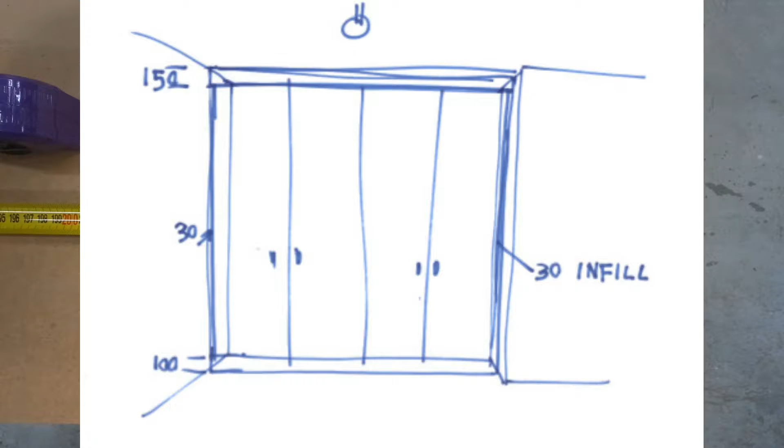If it's a number that's a bit tricky, you can also go the other way. Start from the 100mm mark of your tape measure so as not to include the end. You can come back 50mm, as you can see. We've got it going there. That concurs, so I'll just get that out of the road.

Okay, so that is the limit of our cabinet. So this is the bulkhead, and from here on down is the door. Okay, so what we're going to do now is use the square as a gauge, and follow along with me.

The front edge of the door. Now the door is 16mm thick. It's not essential to make the doors the correct thickness here, because all we're interested in is the height at the moment. Then we need to go 40mm back from that face to match what we had before in the other drawings, and then a further 16.

Well, first I'll do that. Let's do that. Now, we're not that fussed with the depth, we're more concerned with the height at this point.

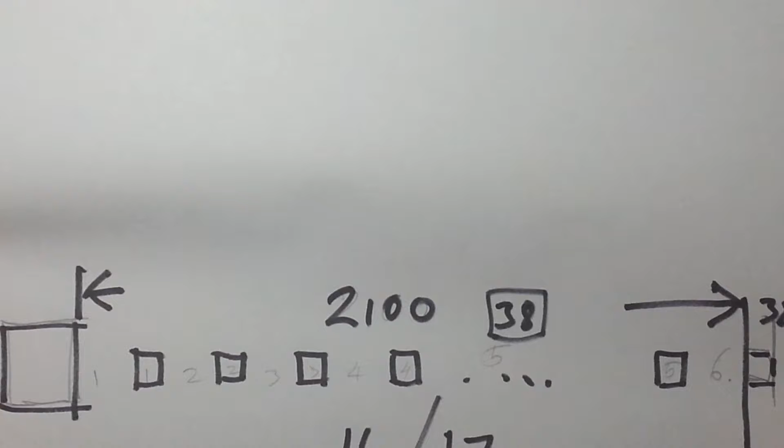Our total number is going to be 17 pieces. So we'll have 16 balusters and 17 spacers. So what we have to do is make our calculation include 17 balusters, 17 spacers. So the 2100 plus 38 is our beginning point.

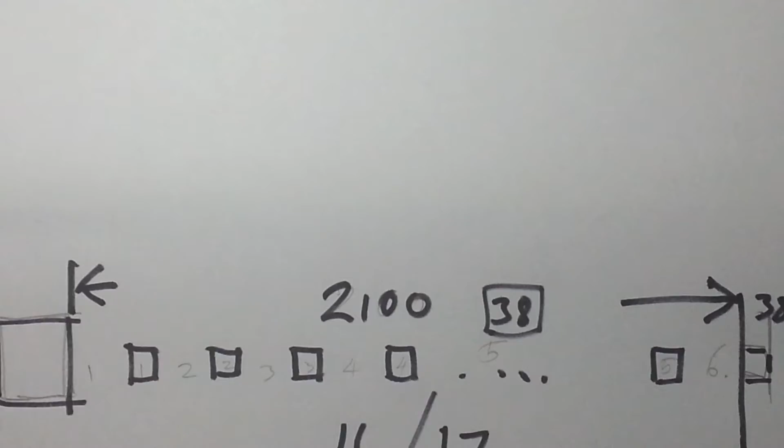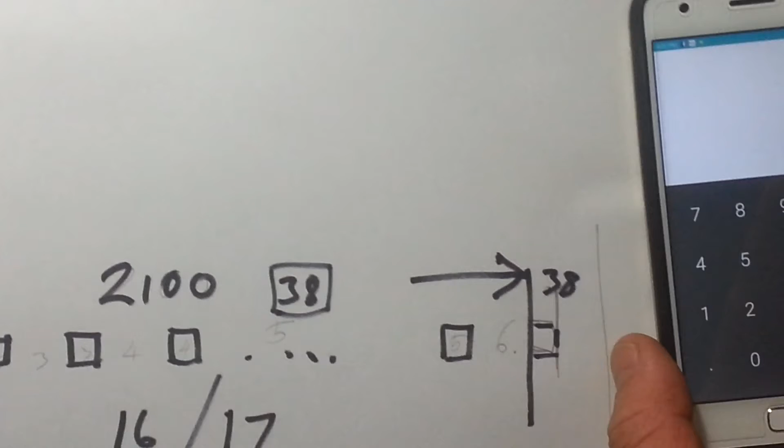I'll use the calculator here. So we have, can you see that? Okay, so if I fit on the same space, see if it does. So 2100 plus 38 is 2138, so it's pretty simple. Divided by 17 is some ghastly number, 125.76 yada yada yada.

Right, now the Casio calculators, which this is one of, if I do the same calculation, I hope I can, oh yeah, that's clear enough. So 2138 divided by 17 equals. Now if we go plus plus, there is a K that shows up here. K being for constant. So if I go 0, press the equals button, it'll add that number, the 125 point yada yada. Every time I press the equals key, it'll add 125 point yada yada to it.

So it's really good for flying along and marking those numbers. So I can go 0. In our case here, we're starting at a 100 millimetre mark. Now I'm not doing a balustrade here, I'm aware of that, but I wish to demonstrate this process of keeping our lines from accumulating an error. Okay, our kick was 100 millimetres high. So we'll go down the other end.

So in the event of us marking out - actually, it was 116 to here. So I'll type in 116. If we press the equals button, it gives us .241. Can you read that? 241.76. So let's call it 242 for the point of exercise.

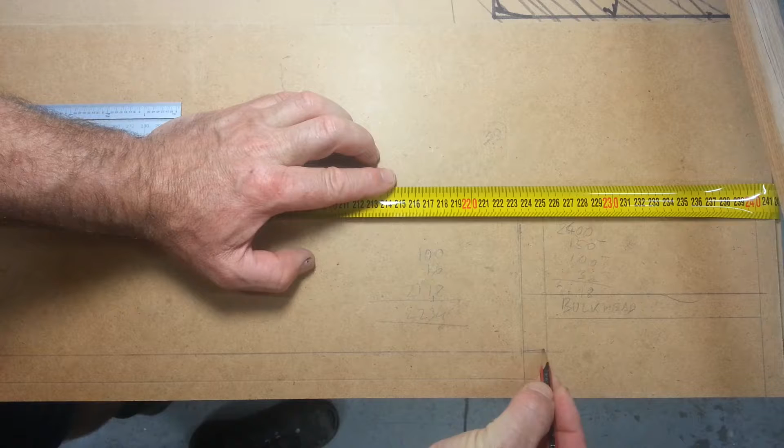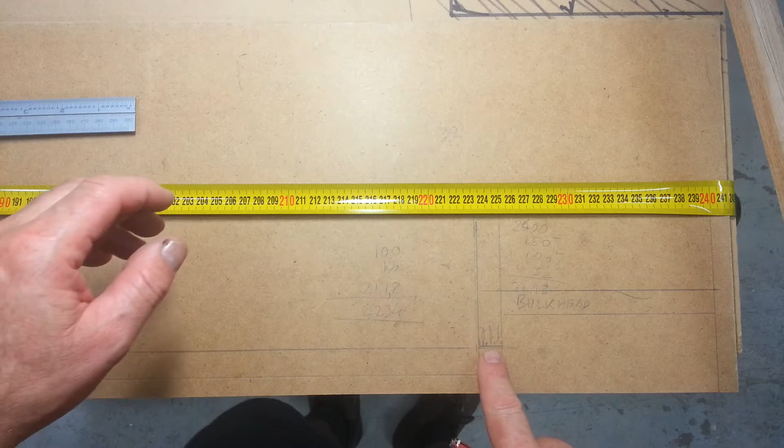Now we can also do something to symbolise the material we're using. This component here, the top, will actually have a bit of edging on it, so we can double up that line to indicate edging, and we can indicate particle board by doing this kind of thing. Just to see how well that shows up - very tricky, this stuff, to use a camera. So you can see here - can you just zoom in a tad? Okay, so there's the particle board symbolised here.

This door - I might write 'door' here just to remind us what this is. Now this unit is very simple, and I'm deliberately using this as a very simple example. Unfortunately it's got very large dimensions, but here we have, in any case, the ability to measure physically off this object, off this drawing, with the real object.

So if you needed to cut items to length, you could compare back to this view. Now again, I'm going to break up this to disguise, shorten the depth basically from front to back. So this is reasonably literal, but the depths aren't important - we're just concerned about the height in this particular run. Okay, so now I guess the next thing to draw would be just the other end, or the other side of the cabinet. Now the blades don't go all the way back, they just go between the door and the front side of the back, and the back is 16mm thick.

Okay. Now you can see here's the top - just write in the word 'top'. Whatever you need to do to symbolise what it is you've drawn. Everyone can invent their own symbols. It's not that critical as to which way things are done, just that you understand what you're drawing.

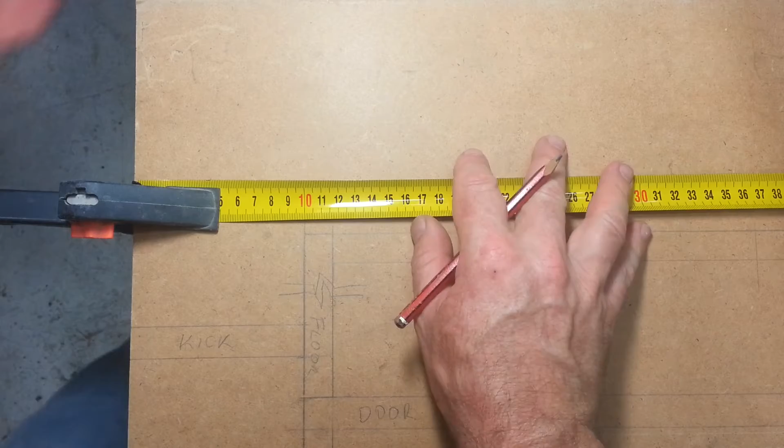Now what I might do behind that, I might set out the width. So again, we'll start this other end. I'll just move my tape measure to somewhere more practical. Now, as you may or may not remember from the other drawings I've done, we have a 30mm infill. So I'm going to start that here. We could get another panel, but I think I'll be able to fit this in here. I'll call this the front surface. So I'll start here.

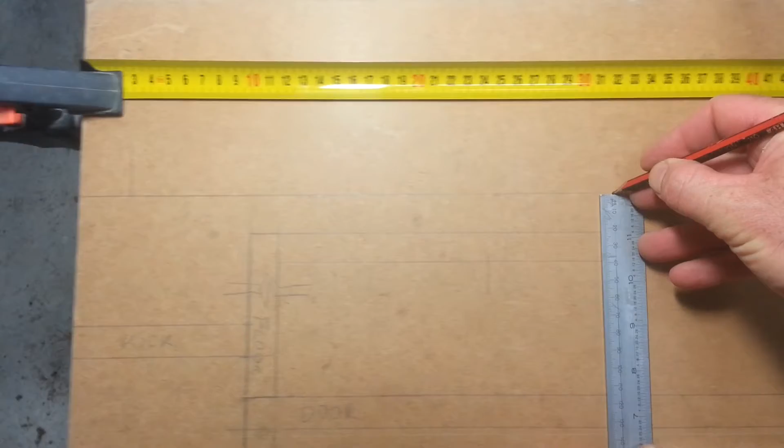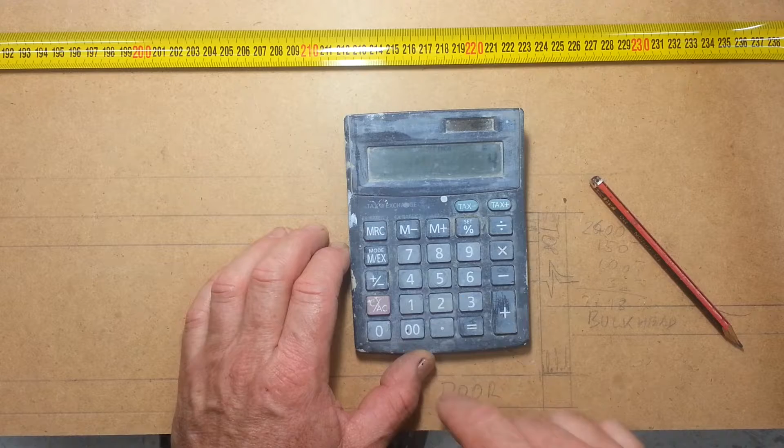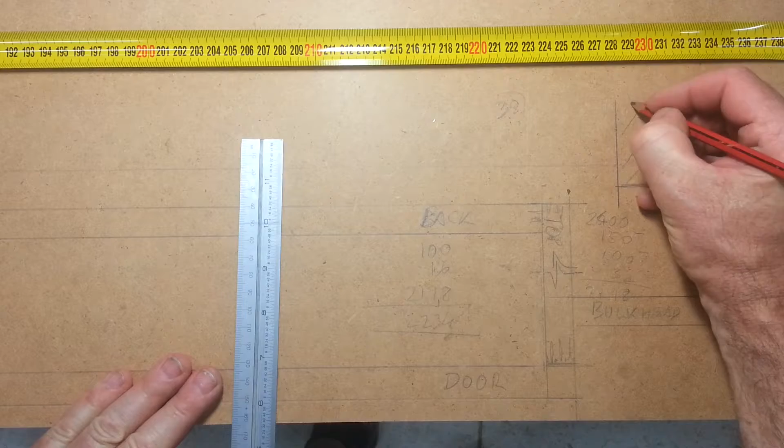Okay. Now, the width we had with our little kludge was 570 times 4. 2280. Okay, so 2280 is nearly the same as our other bits. Now this is the width of the wall, the opening. Okay, so 2280 is here, and I'll just... That's our wall. Okay, I might just make that line a bit deeper.

Okay, now 30mm off that's 2250. Okay, so that's our infill from there to there. The infill is nominally 16mm thick, same as that board. So we'll...

Okay, so then on this side, hopefully it'll show up well enough, we have a 3mm clearance. That'll bring us out to 33. And remember what I was saying about cumulative errors and pencil lines and resolving back all the time? So 33 is where I'm going to stop this. Okay, so we have one clearance here. This is infill. This is our first door. Okay, of course, the same is true the other end.

Three mm is going to be 2247. This is our infill again.

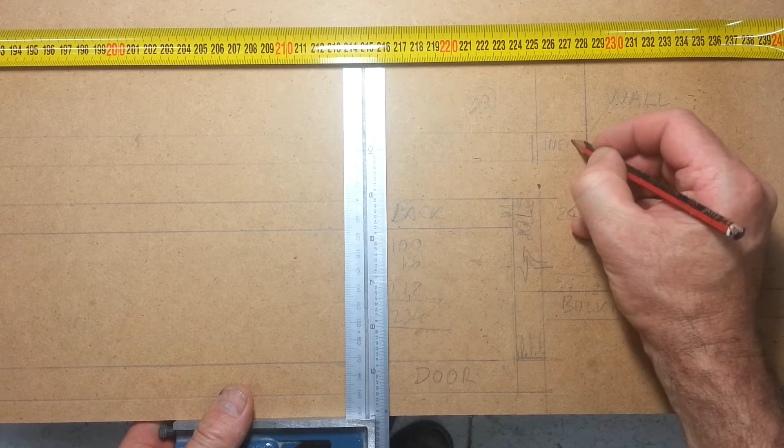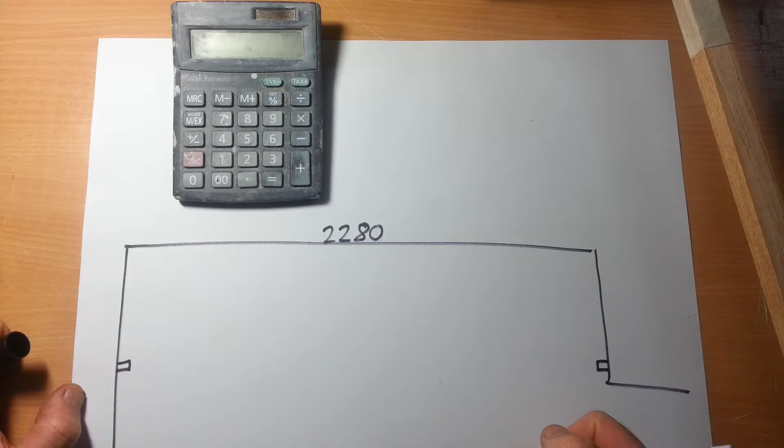Okay, so I'm going to try and explain this very clearly with a fat texter on a white piece of paper. Now, a wall opening is something like this, and it was 2280 overall. We have an infill over here of 30mm, an infill over there of 30mm, and then we intend to have 4 doors. Okay, so I'm just going to divide that up visually.

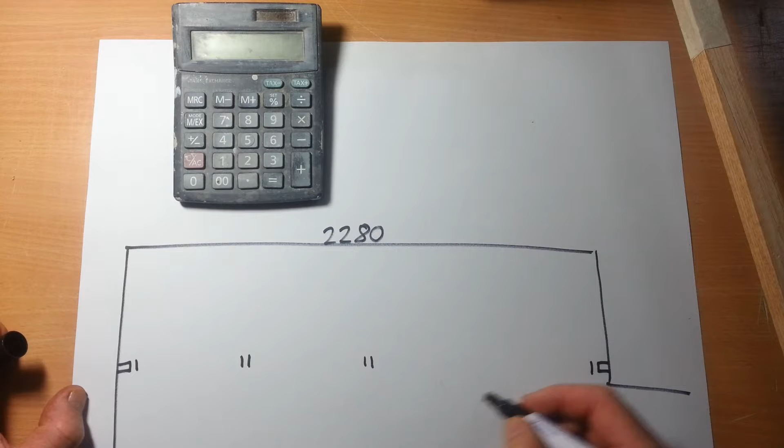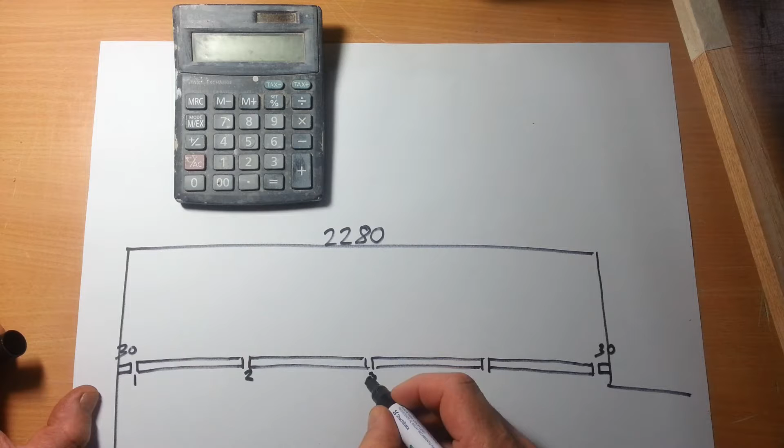Okay, so we have 30 here, 30 there, and we have 1, 2, 3, 4, 5 spaces. 1, 2, 3, 4 doors. So we have to bring our calculation to a point where we can divide by 4. So obviously we've got the infill either end of 30mm, so that's 60mm. 60mm off 2280 will be 2220.

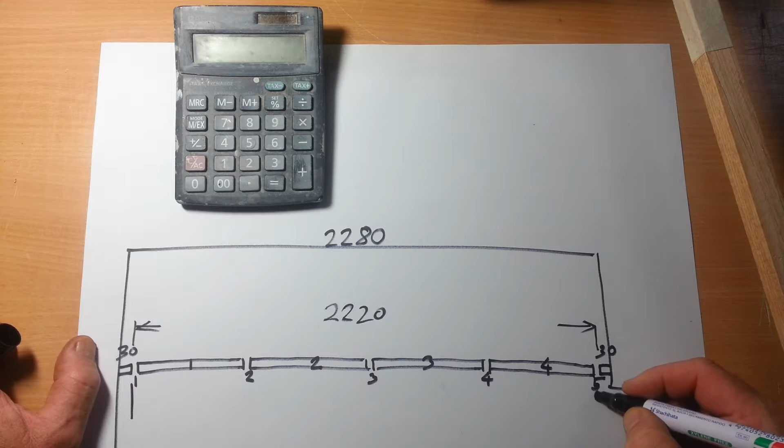Okay, so we've got that isolated, but we've still got a 5th space when we really only want to have 4 doors and 4 spaces, and that's each space is 3mm in width. So we'd have 2220. From here to here, we'd have 2220 less 3, which is of course 2217. But that gives us basically to that line there, from that line to that line there.

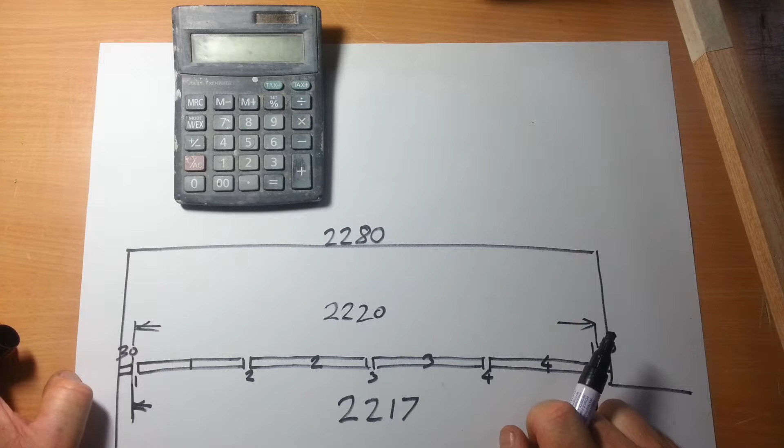Now, we've got the tape measure hooked on the setout rod from the end. So it's basically starting on the left-hand side of this infill. So we've got to keep our errors always resolved back to what the tape measure reads.

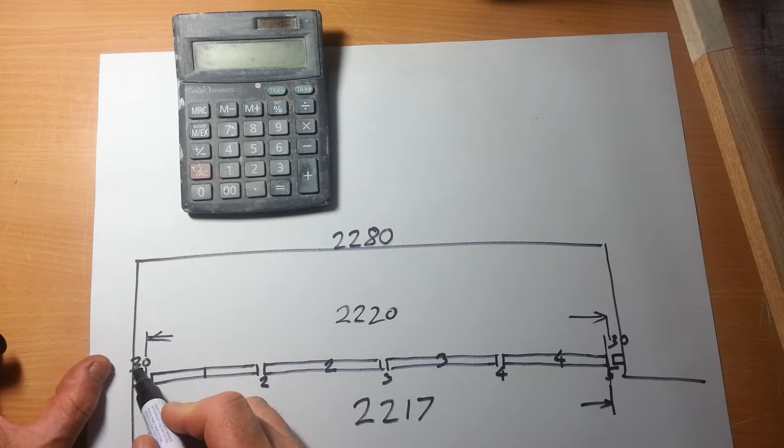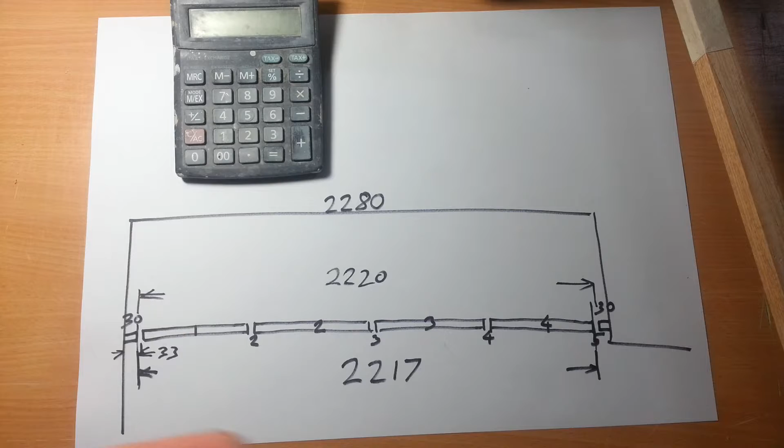Alright, so 2217 is our dimension. Now 30 is easily recognised on the tape measure, you mark that. Then you might even do the 30, the 3mm giving you 33. So from here to here is of course 33mm. Okay, so you may choose, I don't care which way you want to go, that's up to you. Move that better into your view. You could choose to start at 33 or at 30.

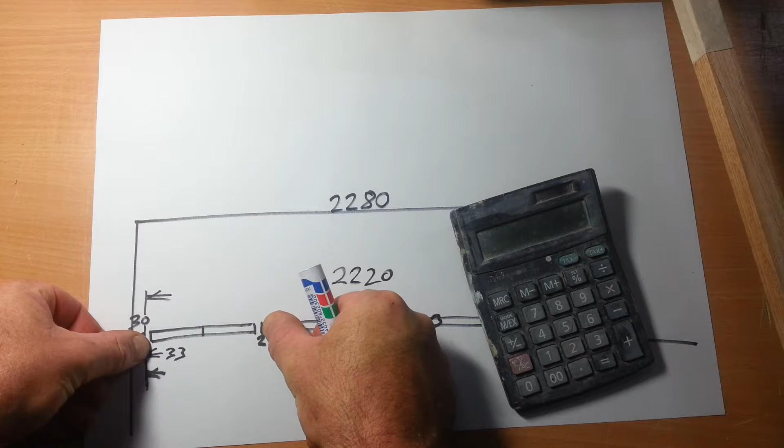If you start at 33, of course, your distance will be referring to the left-hand edge of the consecutive door. If you choose to start at 30, you'll be in the right-hand edge of the first door. So it depends how your logic works. 33 was easy for me to arrive at anyway, so I'm just going to go to the far side. Okay, it's gone to sleep. Put that where you can read it with the lighting.

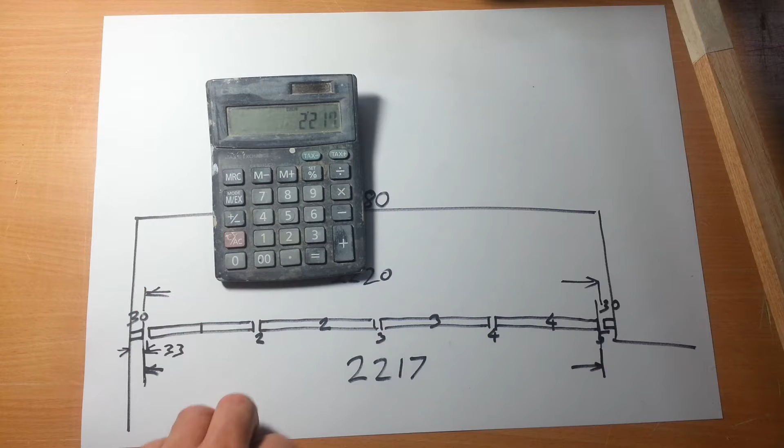So 2217 divided by 4 gives us the 554.25. If we press the plus key twice on a setout calculator, it gives us this K. I'm not sure how well that'll show up. I'll try and get it in a position where you can read it. Is it going to show up? It's a very poor old calculator, very much abused. There's a K in there, trust me. It's pretty hard to see. Alright.

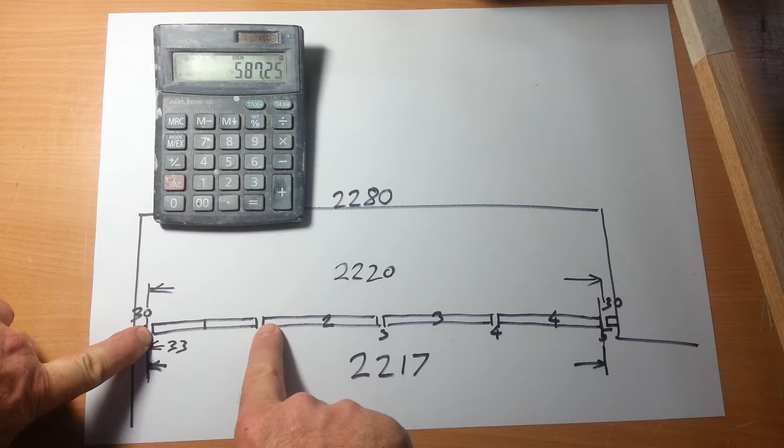So every time I press the equals button, it'll be adding that 554.25 to the number. If I want 0, it'll give me 554.25. If I give 33, which will be this line, it'll give me 587.25. Again, it will give us 1141.5. Again, it will give us 1695.75. Now it's all measuring from this edge because it's including that 33 millimeters.

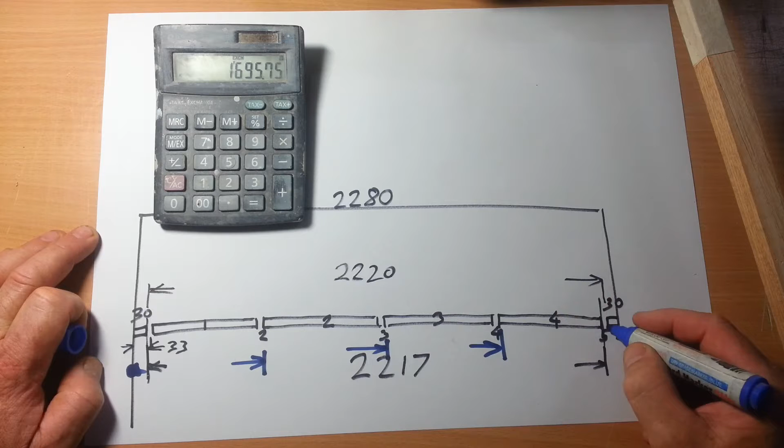So this is what's so important. It's always measuring back to this location, so I'm going to say it's to there, then to there, then to there, and then to there.

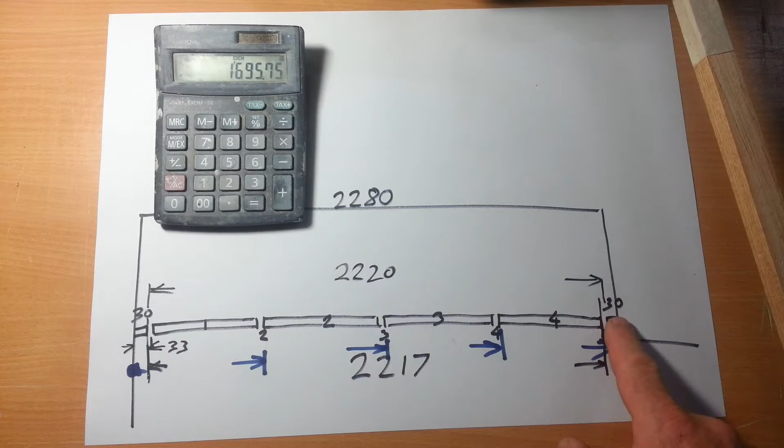There is a little bit of method to the madness of going this way. This will resolve to 2280 less 30. So I want to press this key one more time. It should give us 2250. 30 millimeters off 2280. Bingo, there we are, 2250. So that has not only given us our spacing, but it's also given us an answer that we will recognise very easily.

It's given us that detail right to the far end. So we know when we get there, if it doesn't give us exactly that number, we've done something wrong with our calculation. So it's producing a lot of error correction, this method. It's getting rid of our cumulative pencil line by nature, but it's also verifying that our calculations aren't skewy. If for some reason we divided the 2220 by 4, there would be an accumulated error as we get along.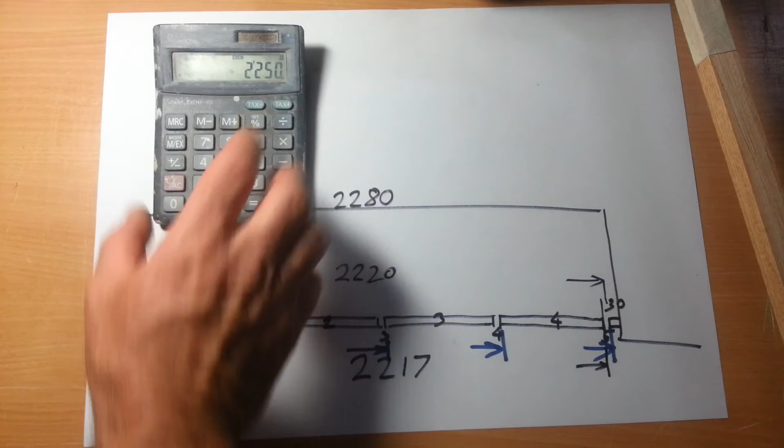Now I'll just try that. Let's just say we did make that mistake. I'll clear all of that. Let's do 2220 divided by 4. Just try and put that where you can read it. It's very difficult. Is that better? Yes, there we go. So we've got 2220 divided by 4, of course, is 555.

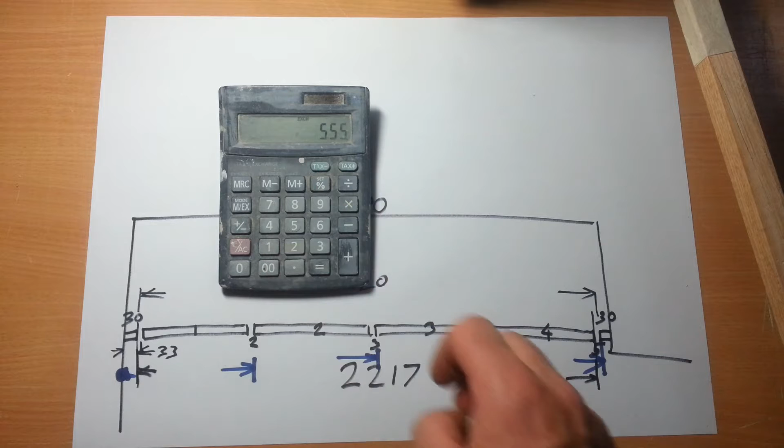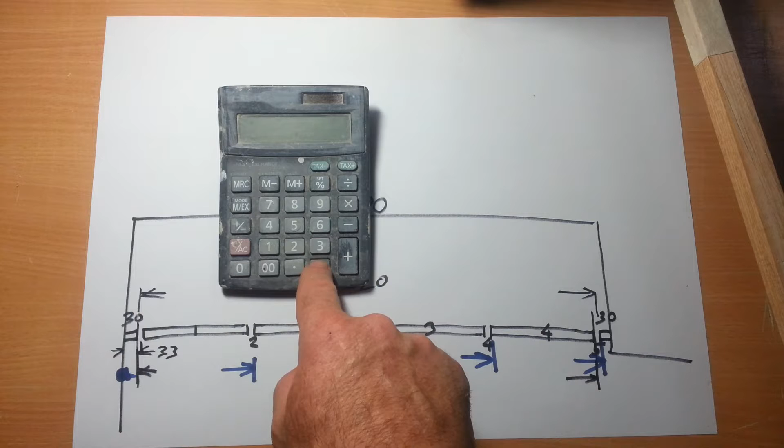If I started with, I'll go plus plus, if I started with 30 and went equals the 4 times, it'd give us 2250, which makes us feel like we're on that side. But the method to my madness of starting with 33 gives us an answer of 2253, which plays no part in our drawing. There is no dimension here. So this is why starting at 33 has a merit.

If you keep in your head that it has to be 2247, starting at the left-hand edge, that's all well and good. So it gets a bit tricky either way, but 33 works for me. You might disagree and think exactly reverse. That's your good business, but that works for me.

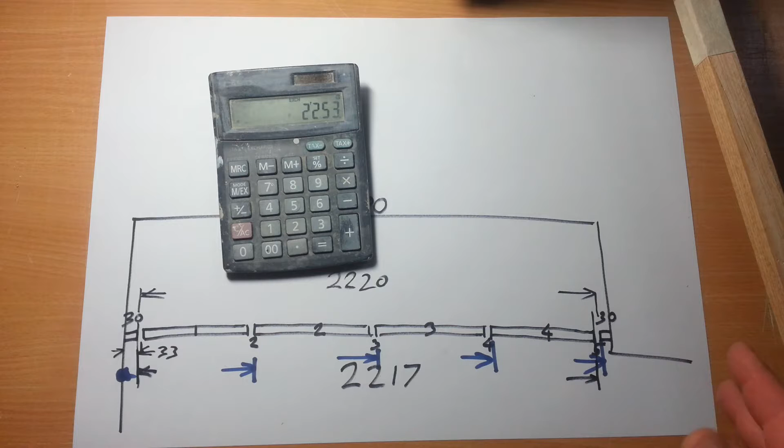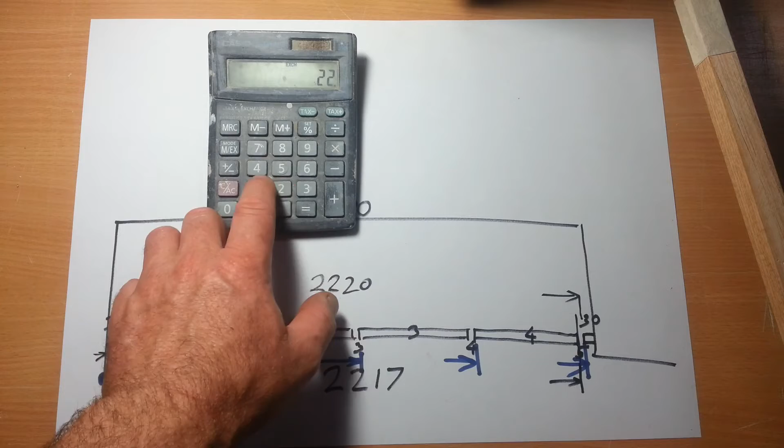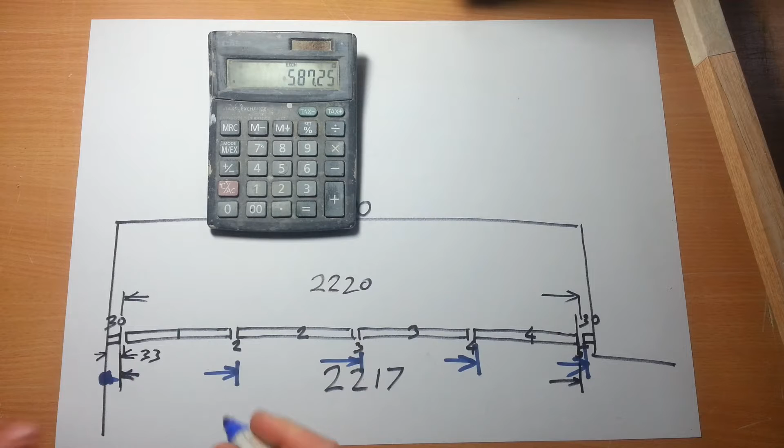Okay, so those are our numbers. I'll clear all of that and write them down on our little sketch here. I keep moving that to where my right hand works, but then you can't see it. Alright, so we've got 2217 divided by 4, plus 33, equals. So this dimension here is 587.25. Again, 1141.5. Again, 1695.75. And of course the last one is 2250.

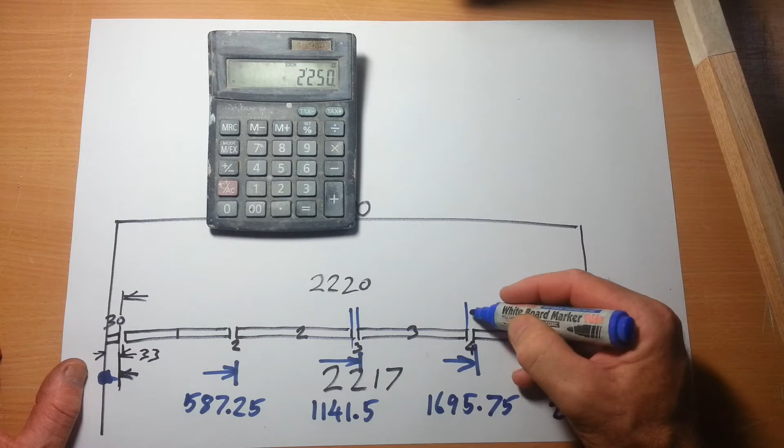And then of course we'd go in and just mark back 3 millimeters from each one of those edges, so we end up with those gaps of 3 millimeters. Alright, I hope that was clear enough. 1696, and basically we come back 3 millimeters. Now you can go along, I'm just going to guess it for the point of the exercise.

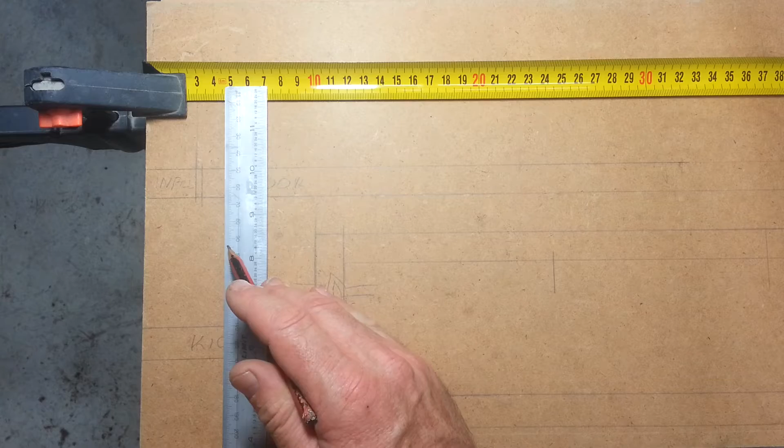We have the infill drawn in, and we've got the end panel of the cabinet. Well, let's show now. There we go. So this is the end panel of the cabinet, or blade. I'm going to call it a blade. The lighting's a bit difficult with this camera rig. Here we go. So we've got the other blade.

Now everything is concentric here, so here's the centre of the doors. The overall opening was 2280, so half of that would be 1140. That would be a very tempting thing to just use that calculation. But that assumes that both our infills are the same, so it depends where you want to go from. At the end of the day, it will produce this outcome on this job. But in any case, if you had to do something different, where your infills, say one side's 50 and the other side's, I don't know, 20, you may have to do something a little bit different.

But hang on, that's a bit out of position anyway. It's very easy to get these slightly errored. I'm out by about half a millimetre there. Okay, that's the division between the two cabinets. 16 millimetres both ways will give us the blades. Double checking us back to that. That looks pretty good. Alright, so now we have the two blades here.

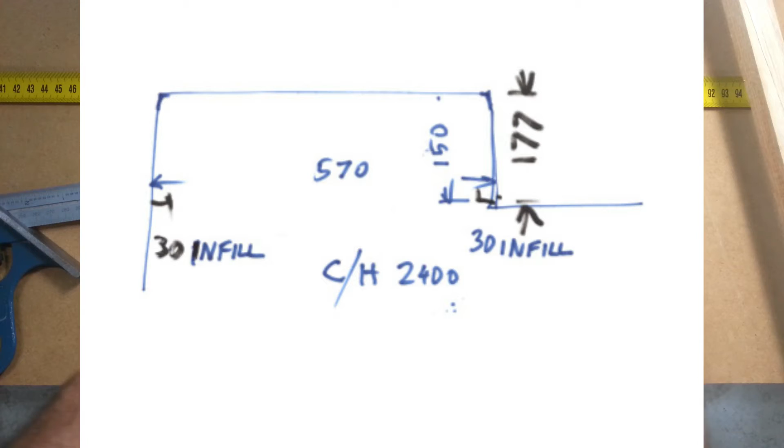So for this view, we're only going to be drawing the depth front to back. Now the opening width, the opening depth is going to be, based on our original drawings, 177 times 4, which equals 708. Okay, so just draw that line in there. Can you see that line in there?

The cabinet is set back 20 millimeters, which brings us to 688. Just going to draw the underside of the cabinet. Okay, so that's the under edge of our cabinet visualised. So this will be the face of the door. Maybe infill to the same location in this view. It's 16 millimeters thick.

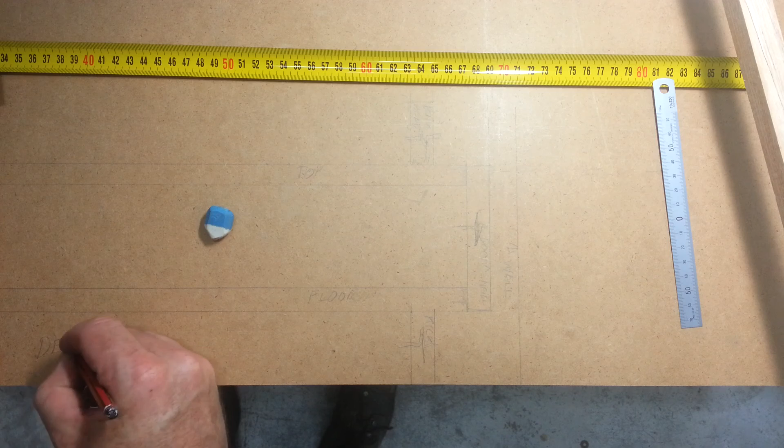Maybe on one of the 3D drawings I ended up doing a set of drawers, so you might set out the drawers, drawer fronts, etc. But in any case, this is showing the depth. I guess that's something I should have said in the first place. So these setouts are only to resolve in full size one single axis, and that's quite an important detail.

Well, I hope that was of interest to you, and I hope that it's useful to you somewhere down the track. Of course, this method is probably the best method if you're stuck for resources, and also it always works.